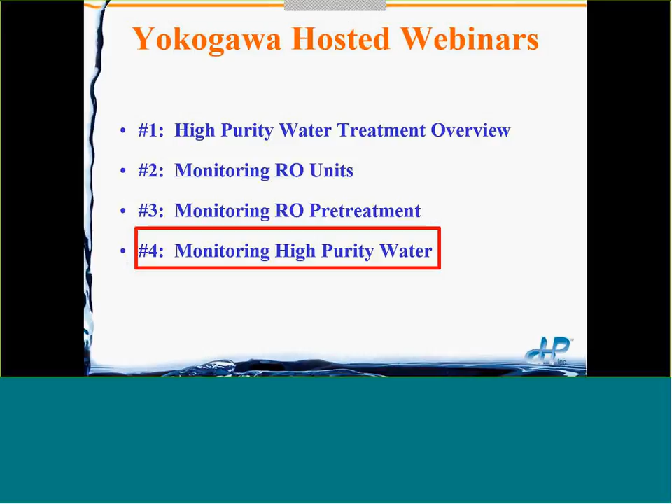So this is the 4th of 4 webinars. We started with an overview, then we looked at monitoring RO units as the main focus, and the third one was monitoring RO pretreatment. Today it's looking downstream of the RO unit, particularly how important it is to ensure that your primary RO unit, your pass RO units, are operating excellently, because you'll have few problems downstream ordinarily if we can make sure the RO units are operating well.

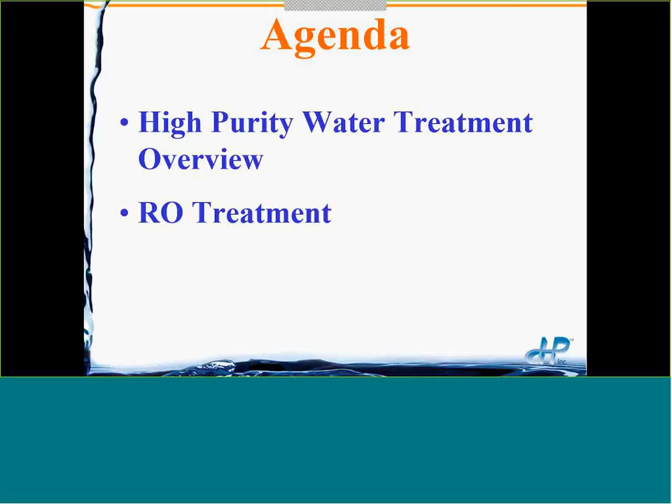So we'll look at high purity water treatment very briefly again, to bring everybody up to speed. A little bit on RO treatment, but then the main point of today's webinar is going to be monitoring the RO unit so that downstream equipment will be operating well. So we'll look at what we need to monitor.

So just an overview from the first session, to make sure we have the terminology down. High purity water treatment is simply taking a raw water, that could be municipal drinking water or lake water, and taking it up to high purity water. We call it end use because every facility will have different end use requirements, so high purity water for one industry does not equal high purity water for another industry.

In today's world, you almost always, you can just about say always, have an RO step between raw water and end use. This is the technology that's going to remove more contaminants, dissolved and suspended, than anything else.

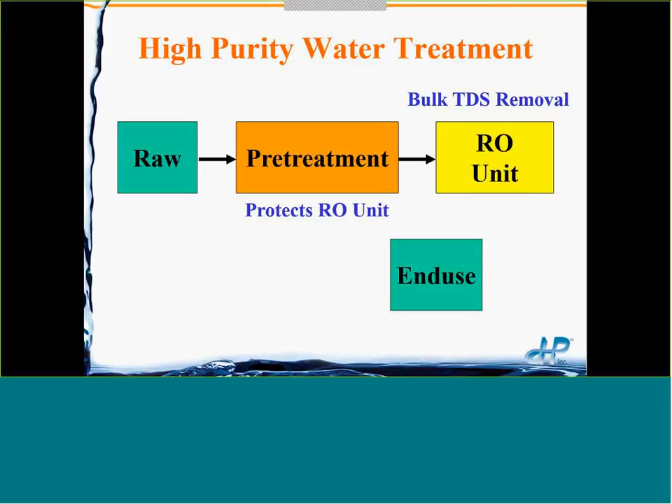We have to protect the RO unit from scaling, fouling, and chemical attack by putting equipment in front of it—we call that pretreatment. Ordinarily, the water that goes through the RO membrane, called permeate, does not meet end-use specifications, so they have to polish the RO permeate up to the specifications of the use requirements.

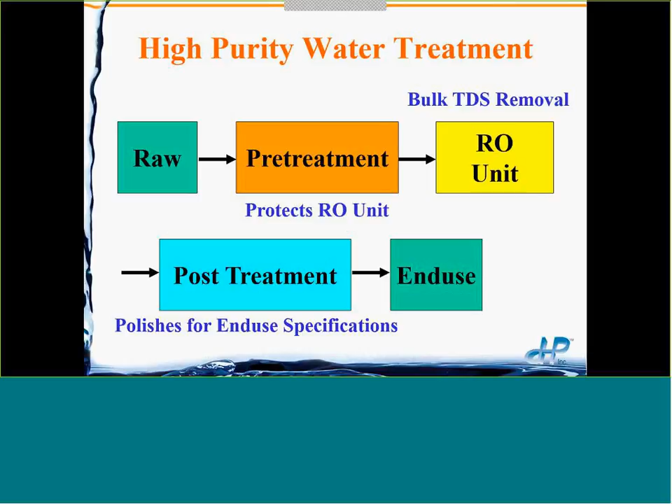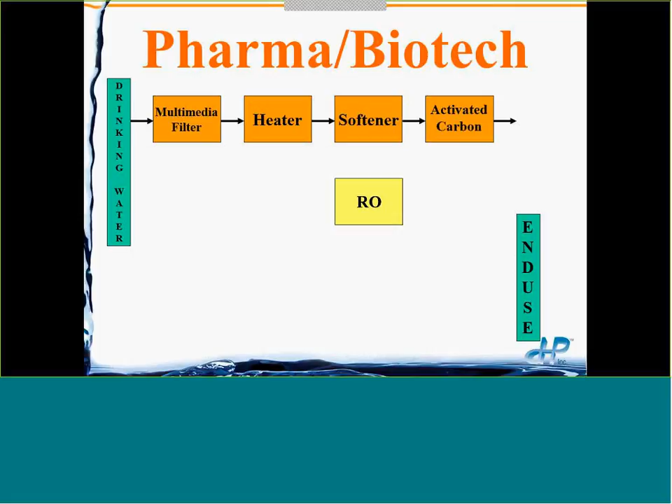As an example, here we have an RO treatment step between drinking water as the raw water and the end-use water for pharmaceutical or biotech, which would be water for injection or purified water. So we looked at pretreatment, and pretreatment for biopharm type systems is different than what you see in a lot of other industrial applications—here we see softener, activated carbon, UV. This won't be as common in other industries.

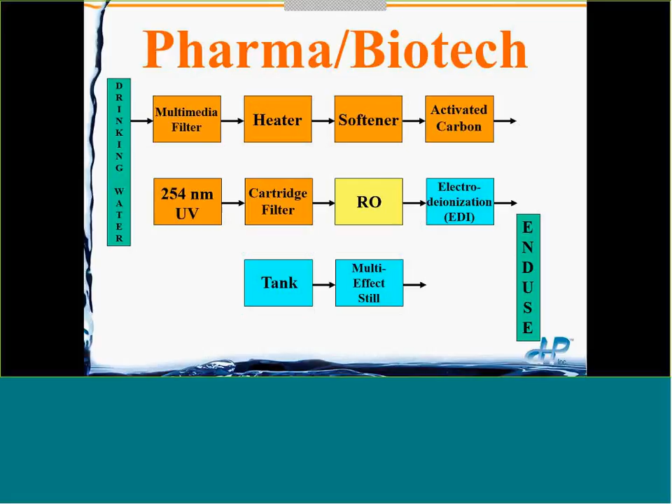Downstream, we're seeing electrodeionization and a multi-effect still—you basically only see stills in biopharm applications.

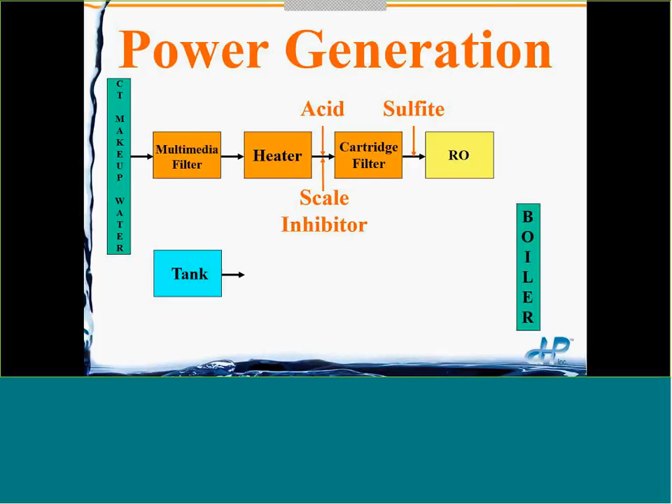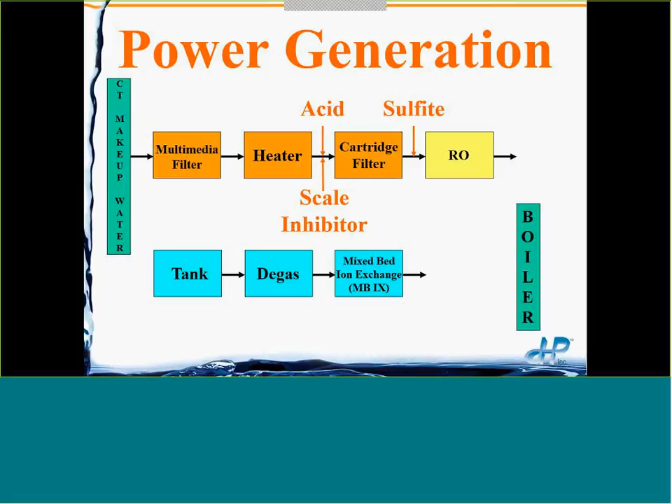Looking at power generation, we see that the treatment to protect the RO unit from scaling, fouling, and chemical attack is totally different than what we saw before. But for high purity water, we have a mixed bed ion exchange. Everything downstream of the RO system is going to be impacted negatively if we allow that RO unit's performance to head south on us.

The last one is semiconductor. Here we're seeing exactly the same kind of pretreatment that we saw in power generation. Now, in this case, we actually have a double pass RO unit.

So today, as I'm talking about monitoring and the importance of making sure that RO unit is operating properly, we're talking about the first pass RO unit. If that first pass RO unit is operating well, you'll likely have few, if any, problems downstream with that second pass RO system.

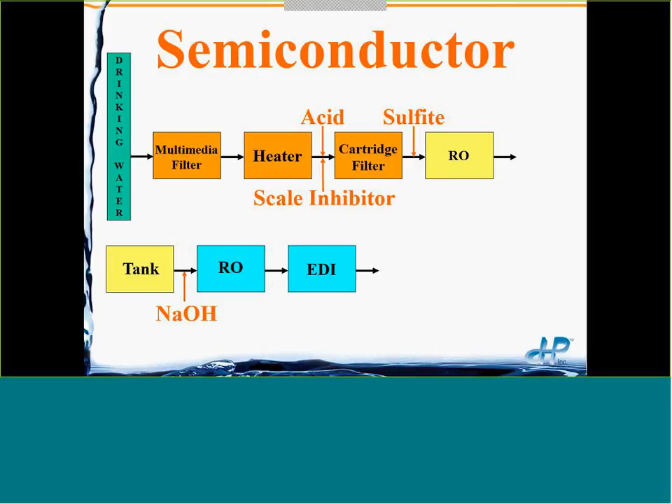Over several years, I can think of maybe 3 or 4 times we've been called on for consulting, and it reminds me of seeing this EDI unit where a plant says, 'Oh, I've got big EDI problems, would you come and help us fix the EDI problems?' My answer to that is, if you have EDI problems, you have upstream RO problems. So you need to focus on the RO problems and get that fixed prior to working on the EDI system.

Just keep that in mind—when you start having problems downstream, you need to take a hard look and make sure the RO unit is not having a problem. Because with this kind of system we're looking at right now, you have double pass RO, EDI, mixed bed, and a lot of other treatment steps to come.

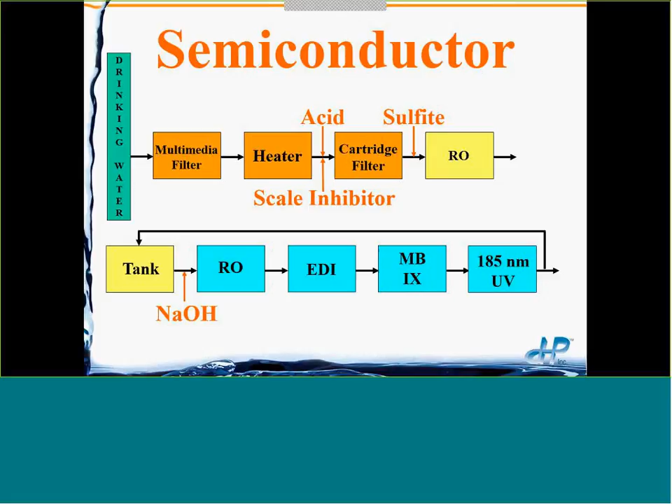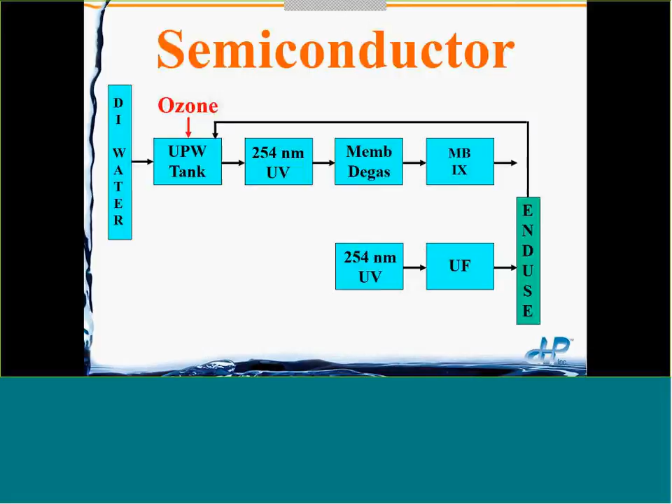Use water may be fine, but you're paying the price because these other technologies are polishing up the problems that a poor performing RO unit is giving you. You're paying that price even if you're meeting end specifications. Additional treatment steps—again, all of these are going to be negatively impacted when the RO unit is poorly performing.

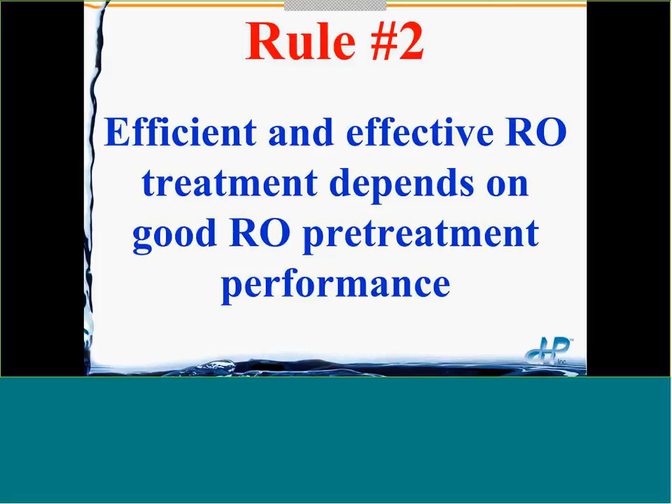So rule number 1: the efficient and effective downstream treatment depends on good RO unit performance. Rule number 2: efficient and effective RO treatment depends on good RO pretreatment performance. So when we see problems downstream, we need to look at the RO unit. When we see problems with the RO unit, we ought to look upstream—we have pretreatment issues that are not protecting the RO unit from scaling, fouling, and chemical attack.

So it's probably one of the most important things, and we covered some of this in a second webinar which is available online. You can go to Yokogawa and view that if you didn't get a chance to see the second webinar.

They're looking at how RO membranes reject dissolved and suspended contaminants, and that we have charged and uncharged contaminants under dissolved, and living and non-living. This is important to remember: something that has a charge, we call those ions. Ions are very well rejected, and the more charges an ion has, the better it's rejected.

Other things, though, have to be rejected based on size alone.

So gases like CO2, oxygen, nitrogen, and sulfide, your normal gases that could be dissolved in water, basically go through the membrane, not rejected at all. Whether other uncharged things go through the membrane will depend on the molecular weight. Below 20 Daltons molecular weight, we get no rejection, and as you get bigger and bigger molecules, you get better and better rejection.

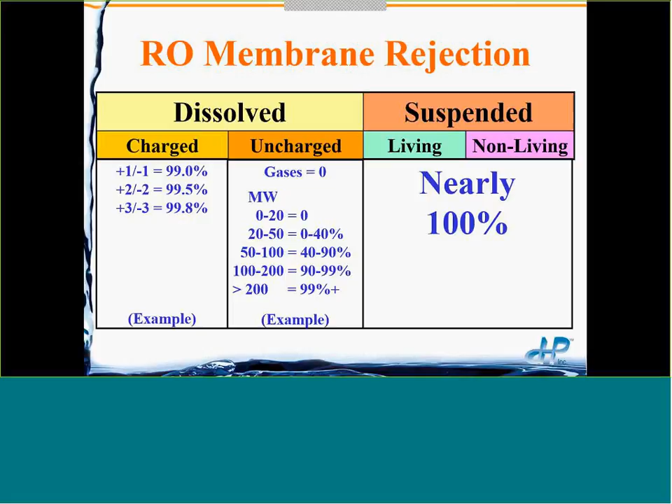Finally, because suspended particles are all relatively huge compared to dissolved substances, rejection is going to be nearly 100%. There will just be little imperfections in the membrane that allow a few viruses through, like 1 in every 10,000, but still nearly 100%. So to summarize: suspended particles get almost 100% rejection, dissolved substances get 99, 99.5, 99.8% rejection.

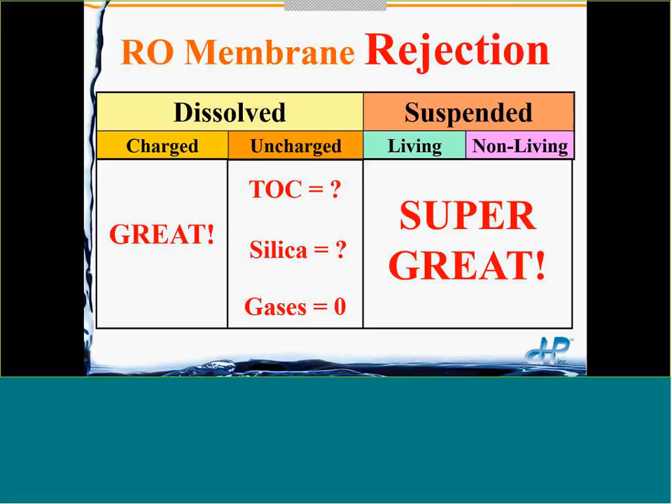Our issue is going to be uncharged compounds, like TOC, total organic carbon, total oxidizable carbon. Those compounds are uncharged, so it depends upon size. If they're huge, they're going to be rejected well, but if they're tiny, they're going to go through the membrane. This is also true for silica and many uncharged compounds, so there will be a different amount of silica that passes through the membrane depending on water conditions. And gases, 0% rejection.

With organics, basically any compound has a carbon atom in it, symbol C, except for a few forms. Things that came directly from carbon dioxide, like carbonic acid and bicarbonate ion, and pure forms of carbon like graphite, diamond, and activated carbon, are not organics - anything else is. We call them organics because they basically all come from organisms. You never know - you could have 5 milligrams per liter of TOC in your feed water, and that could be 50,000 different compounds. We have no idea, because there are so many organic compounds.

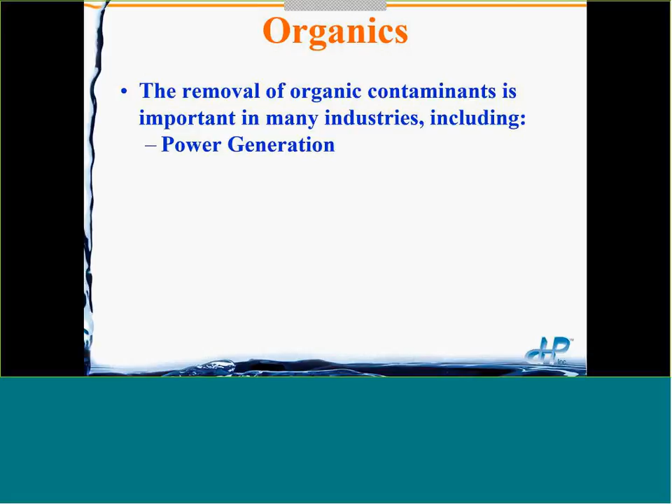Some industries worry about organics as a problem, others don't, so some worry about TOC and others don't. But the thing I want you to remember about organic compounds is that some of them can directly foul membranes and ion exchange resin - directly meaning they bond right to the membrane. So oil or cationic polymer can bond right to the membrane.

But the really important thing for everyone to realize is that organic compounds are food for bacteria - at least certain organic compounds are. So that TOC that passes through the membrane is uncharged and small, and it's likely that many of these organic compounds are going to be food sources for bacteria downstream. So the big part of this discussion is that if the RO membrane is not rejecting well, if it's performing poorly, then organics are going to pass through the membrane more. We measure organic compounds with TOC.

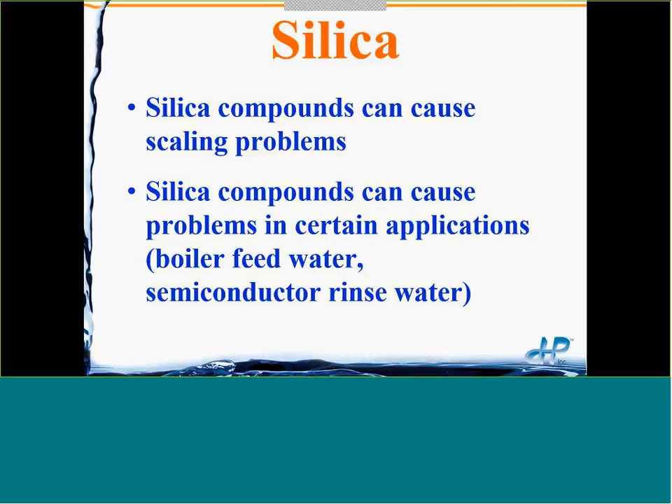Well, CO2 turns into bicarbonate ion at higher pH. Now remember, membranes reject charged things really, really well, and the more charges, the better it's rejected. So CO2 is the gas - CO2 is not rejected by an RO membrane. Bicarbonate ion is, and it's rejected well - it could be 98%.

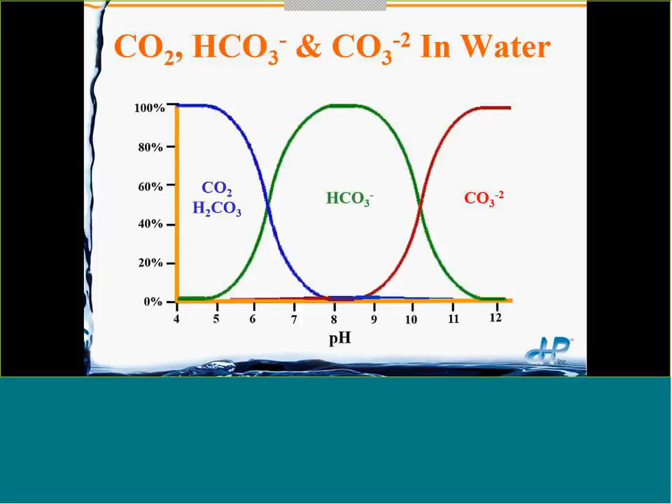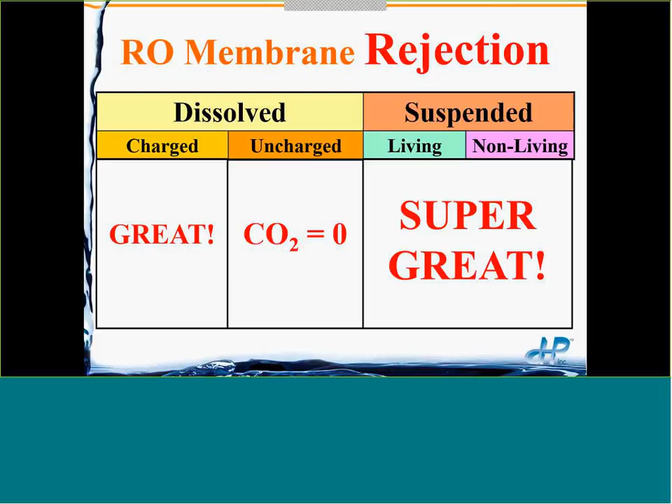So when you put those 3 graphs together, this is what you get. Dissolved CO2, or carbonic acid, is at the lower pH range, but in the normal operating range of an RO unit, most of your CO2 is going to be in the bicarbonate ion form, though you also have dissolved CO2. So if we're only looking at CO2, since there's always a significant amount of CO2 in the feed water, we see CO2 is not rejected by the RO membrane.

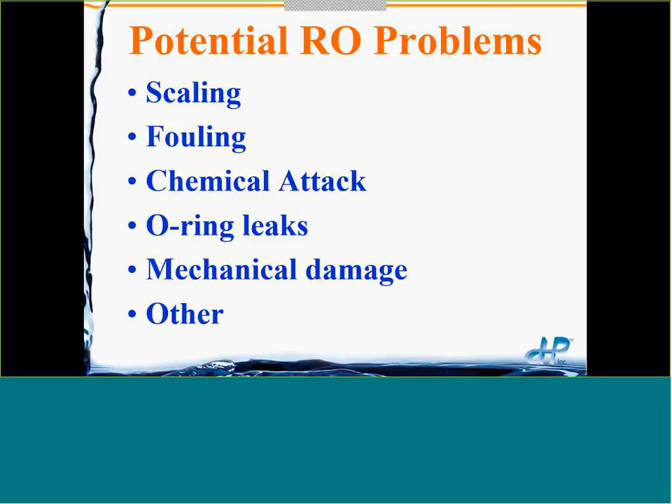We talked in the last pretreatment webinar about potential RO problems of scaling, fouling, and chemical attack. We did not talk about other problems like o-ring leaks or mechanical damage, where particles might cut a membrane. One case, a pump impeller blew up and cut the lead membrane with a chunk from the impeller.

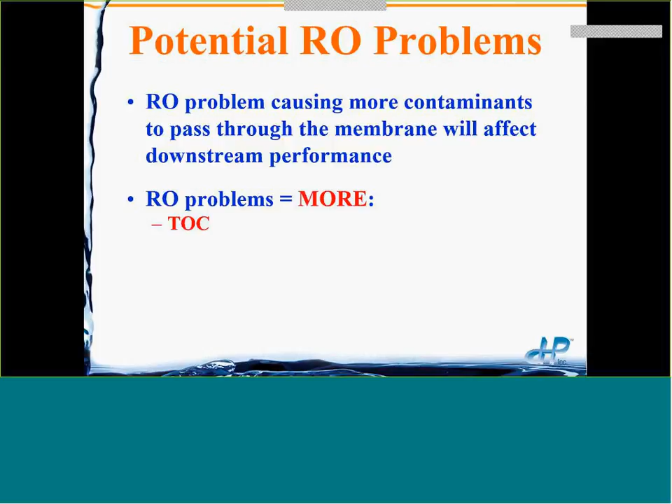So anything that would damage the membrane would cause more contaminants to go through it. Anything that reduces the performance of RO membrane rejection is going to put more contaminants downstream, impacting the downstream purity treatment steps. With RO problems, you're going to get more TOC, more organics going through, more CO2 going through, more monovalent ions (single charged ions), and more divalent ions.

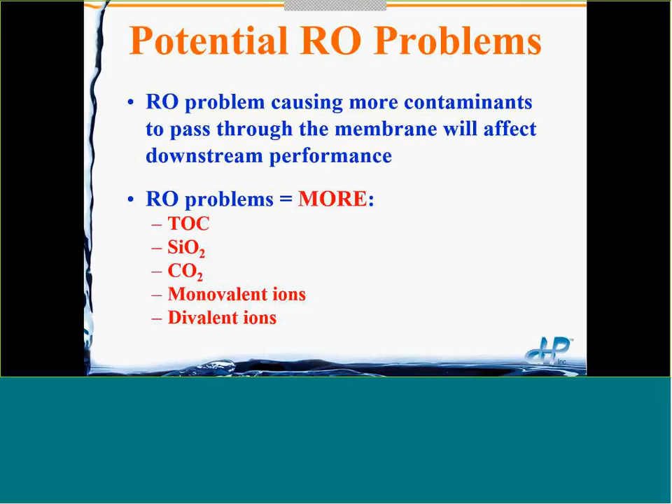So this is something to keep in mind: if the membrane gets damaged, like from chlorine attack, at a certain point it will let the monovalents through, but the divalents are still very well rejected. As more damage occurs, the divalents start going through as well. So if we catch problems at an early stage, that's going to be best for us.

Now let's talk about the potential consequences of bad RO unit performance. In this case, the RO box is shown red, meaning the RO unit has problems: scaling, fouling, chemical attack, an o-ring leak, permeate back pressure damage, anything that could cause the membrane to not reject feed water contaminants. That's then going to allow more contaminants to go through the RO membrane and happen downstream.

TOC going through can, over time, biofoul a tank. I was at a power plant about 4 years ago, I can't remember exactly, maybe 3 or 5 years. This huge tank, like a 1 million gallon tank, became biofouled, and the way we found it was that the mixed bed had shortened run times and really long rinse-up times.

That's kind of the indicator for organic fouling, so the ion exchange resins were becoming organically fouled. When there's this problem, you get called in saying 'I have a mixed bed problem.'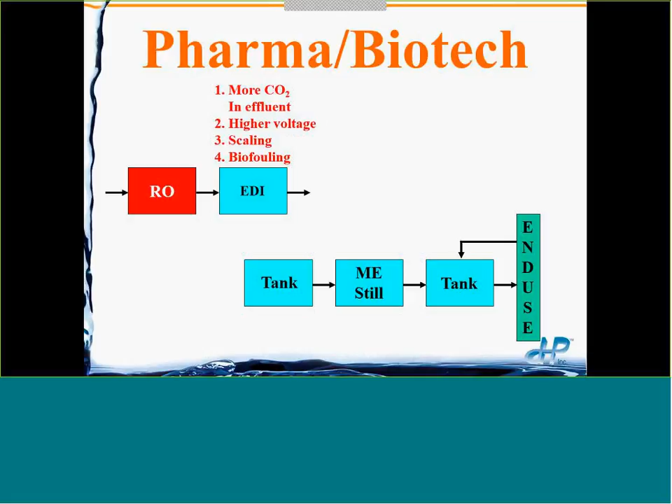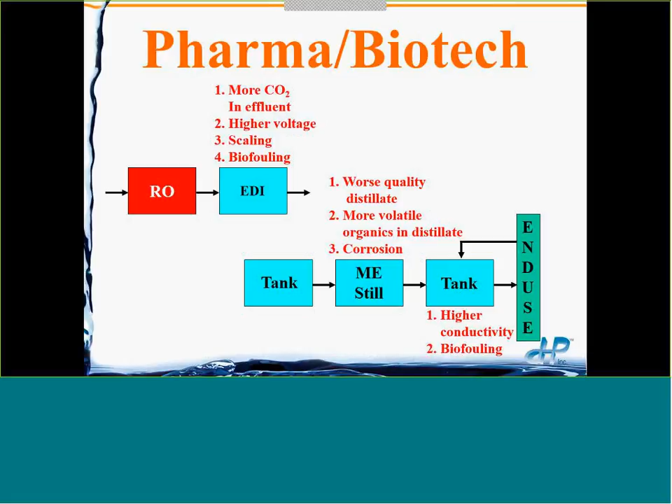And due to the TOC passing through the RO membrane, in areas that are not energized, you get bacterial numbers, I'm calling it biofouling. So impacts, especially volatile organics, the small organic molecules that pass through the RO membrane and the EDI unit, because you've got a bigger load going through, can actually volatilize in the still and cause problems.

We actually had two autopsies come in. Client sent us an element from the second pass RO unit and also from the first pass. I looked at the second pass autopsy first. I couldn't believe it — I've never seen a scaled second pass RO membrane before, ever. It's the only time in all my years that I've ever seen that. And I knew that the first pass had to be just shot for the scale to reach the second pass.

Sure enough, when I looked at the autopsy on the first pass RO unit, it had rejections of like 50%. It was just totally shot. But because you have all this downstream equipment, nobody may be on your case, because the end use quality is still good enough — all this equipment is taking up the slack of that first pass RO unit's poor performance.

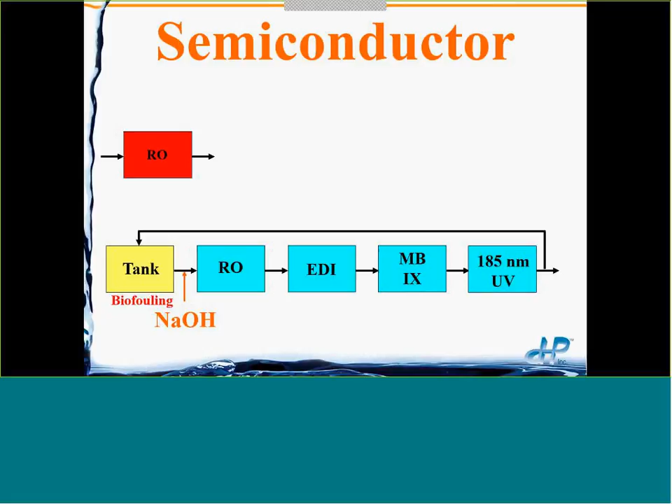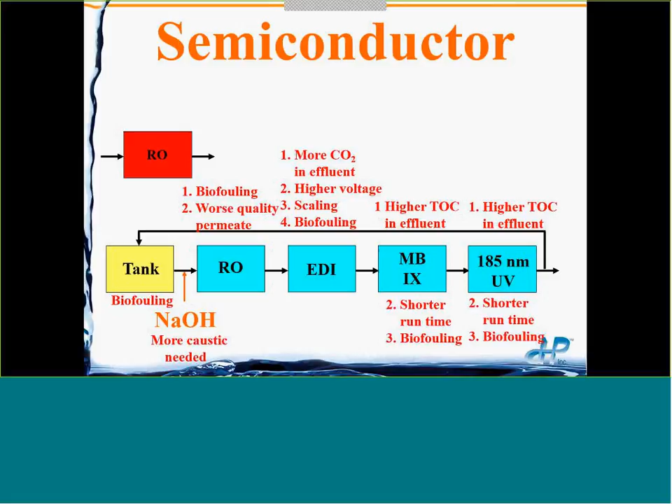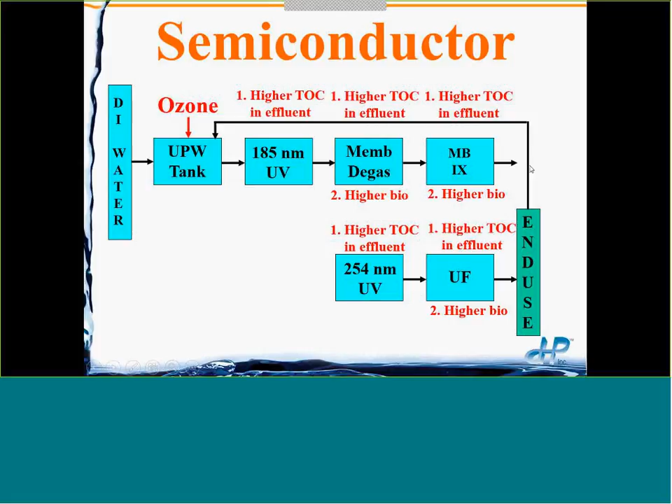But it does take a toll. It's going to cost money. And some of the things we've already talked about, most of these, so I don't need to go over that again. But it's going to reduce the efficiency down until things are really bad, and you're not actually going to see it in the high purity loop, because there are so many treatment steps. But it's going to be a cost to pay for that.

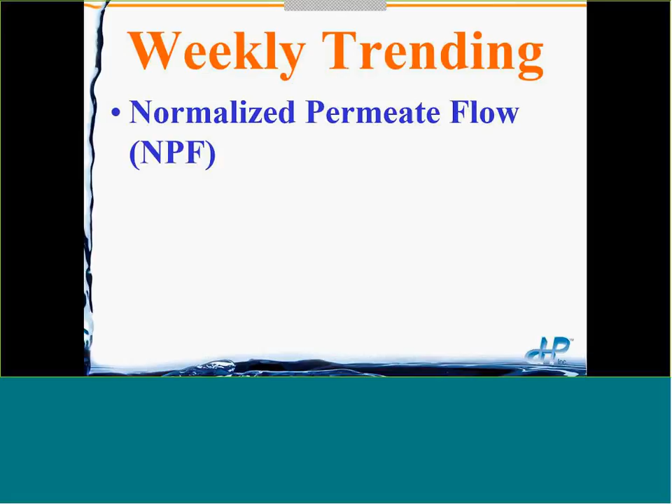So we want to be able to catch problems at an early stage. Now, we went over this in the RO monitoring.

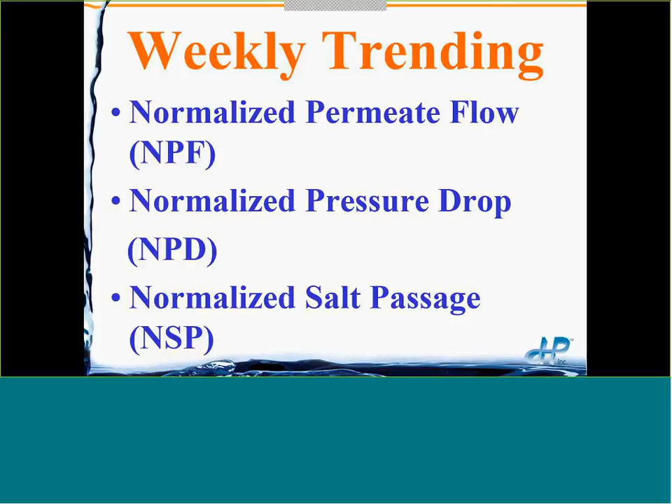Permeate flow, pressure drop, or just pressure drop. Most of your manufacturers' software programs don't normalize for pressure drop, which is normalizing for temperature and flow rate. It's okay even if you just use pressure drop. We want normalized permeate flow, and for sure, normalized salt passage. Why? So we can make sure the system is operating as designed and we catch problems at an early stage. So I'm not going to go into a lot of detail.

We did go over this in the RO monitoring. So notice permeate flow with scaling and fouling — you'll see it trend down. This is where we will jump on things, right when we start seeing problems occur, monitoring and trying to catch these problems at an early stage.

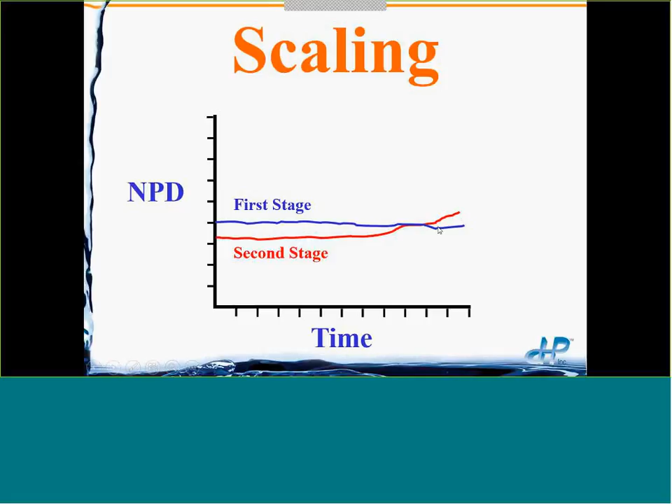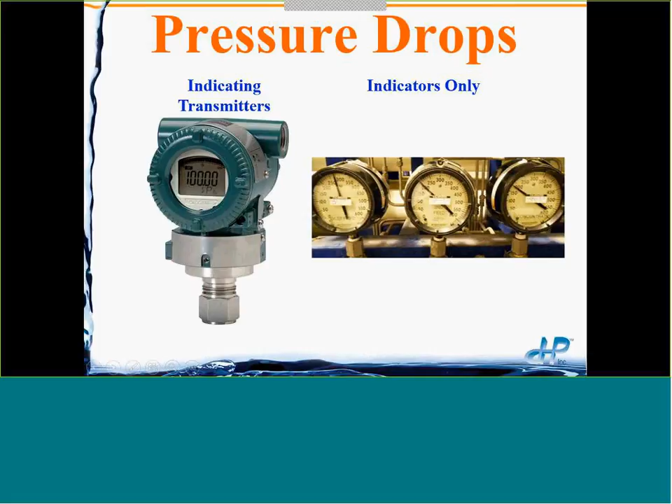This is normalized pressure drop. You should be monitoring the pressure drop across the first stage and the second stage, and that could be with on-stream indicating transmitters, or it could be you have some that just has the indicators only. But input this into performance software programs — all the membrane manufacturers have them for free — and then you monitor your performance.

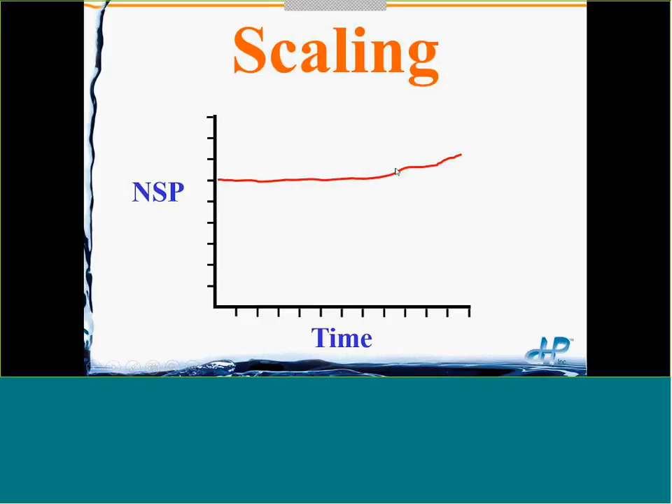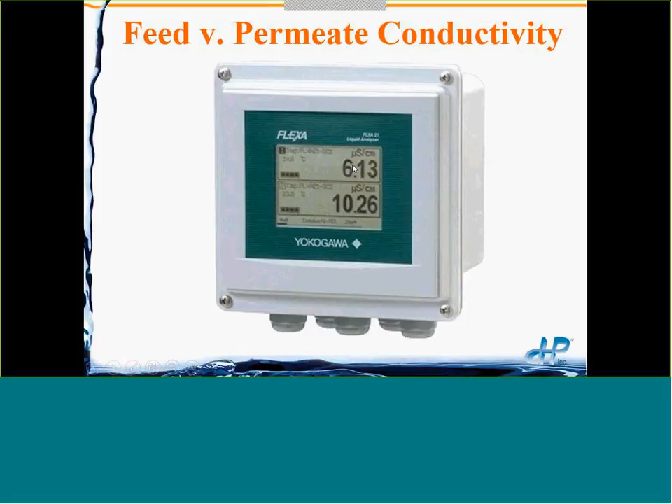So when you start seeing salt passage increase, we don't wait too long before we figure out why that salt passage is increasing, because that is going to impact all of our downstream equipment. Salt passage, we compare the feed and the permeate conductivity. We're actually not looking at feed and permeate here, but we see two channels. We could have a feed and permeate on here and be able to track what's happening.

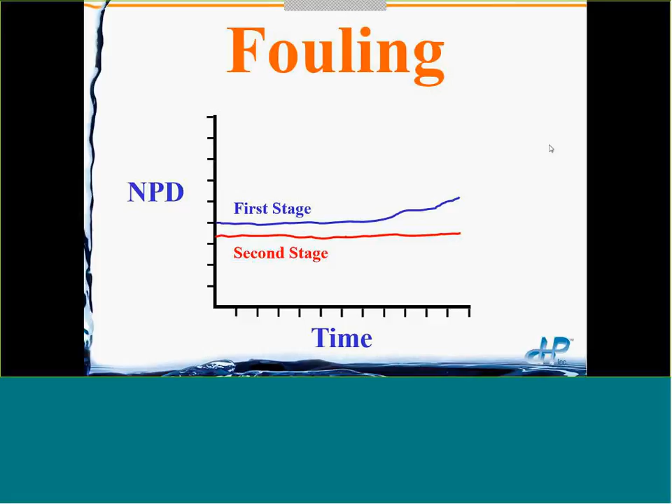At the software programs, for sure, we can track what's happening with the membrane performance. And then for fouling, normalized pressure drop — bio or particulate fouling will actually show in the first stage. So again, we want to judge this at an early stage before it starts impacting our downstream high purity systems.

Being serious, chemical attack can happen almost from day one, so this could be chlorine attack, and we want to jump on it. With chemical attack, the pressure drops won't give us any information, but the salt passage will definitely go up. As we're monitoring downstream of the RO unit, we will monitor the permeate conductivity.

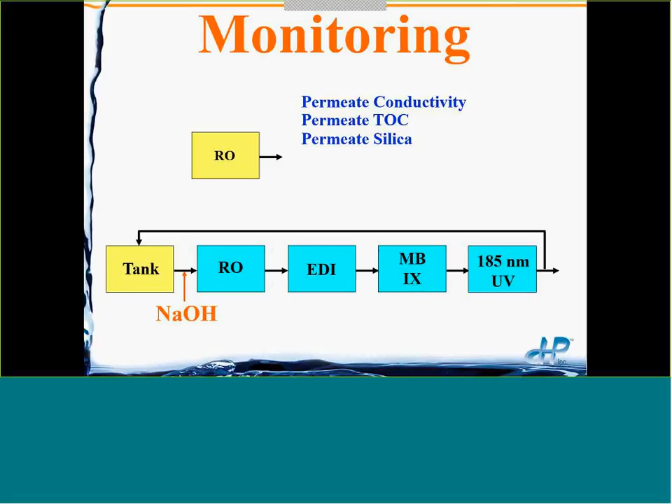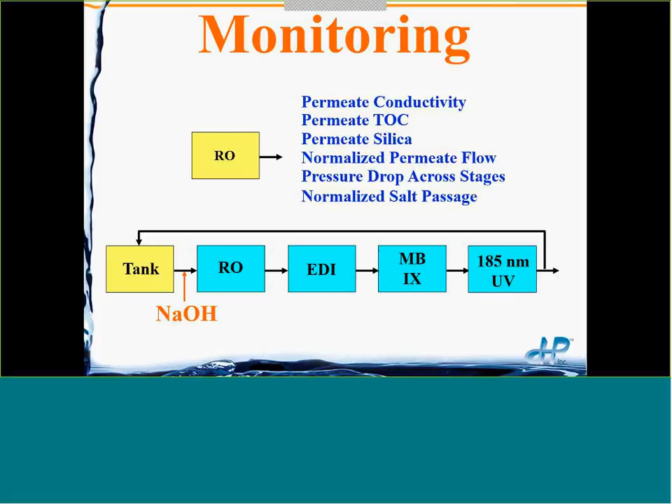We monitor TOC, silica. Now this is for the highest purity system. Not everyone, like I said, cares about silica, but certainly everyone cares about conductivity, permeate flow, the pressure drop across each stage so we can find out whether it's front-end fouling or rear-end scaling, and the normalized salt passage.

With on-stream instruments, we also have to have calibrated bench portable type instruments so that we can make sure that our on-stream instruments are accurate.

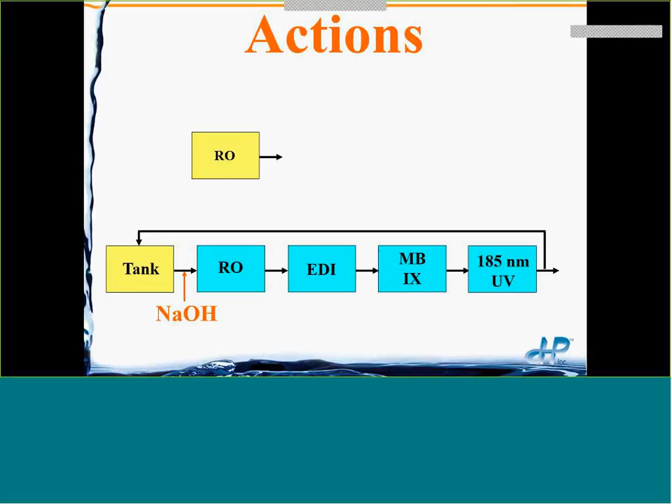Actions that we have to take when there's a problem - this is something that hopefully is intuitively obvious now. If an O-ring leaks, it's hard to imagine there's much worse than that, because an O-ring leak bypasses the membrane. So now particles can go through, double charged ions, single charged ions, really everything. A small portion of the feed water is bypassing the membrane, and that is immediately going to impact downstream.

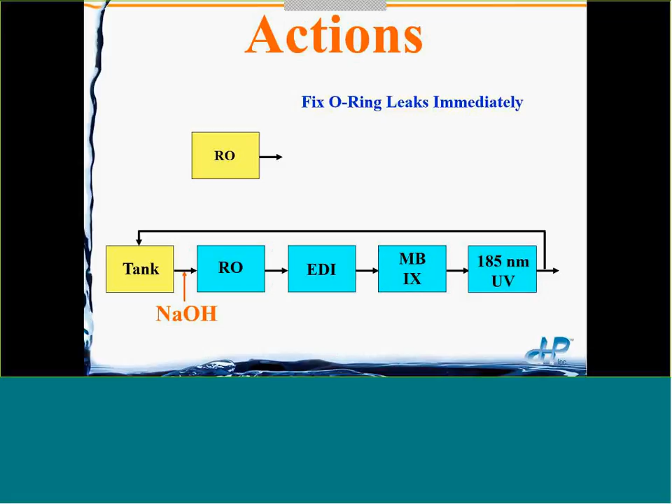Typically, you're not going to see an O-ring leak until you start up, so you may just be running fine, you shut down, you start up, and boom - an O-ring gets cut or in some way is not sealing properly. When you see something like that, it really needs to be jumped on, even if it's not impacting your end use today, it's going to impact your downstream equipment.

Fouling, biofouling being the most common - again, initially downstream equipment is going to save you, but eventually it's going to be a nightmare, so that could require chemical cleaning. With scaling, we don't want scales to stay there, because scales affect conductivity in the permeate, and the starting and stopping of RO units with scale crystals on the membrane can cut the membrane, since crystals can be sharp.

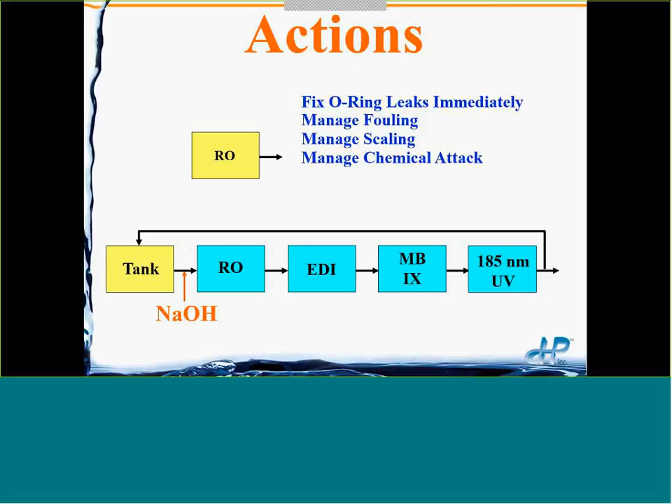So fouling, scaling, and chemical attack, in a lot of cases, mean that you have to look at the pretreatment system and do the things that we talked about in a previous webinar. You want to chemically clean at an early stage - this is a big problem in the industry, we wait too long. So we want to clean early and hope it won't get any worse, trying to keep the conductivity, TOC, and silica down to new or near-new performance.

And then if we see damage, we can replace the damaged elements. That doesn't mean you have to replace every element - it's the ones that can get you back to good performance.

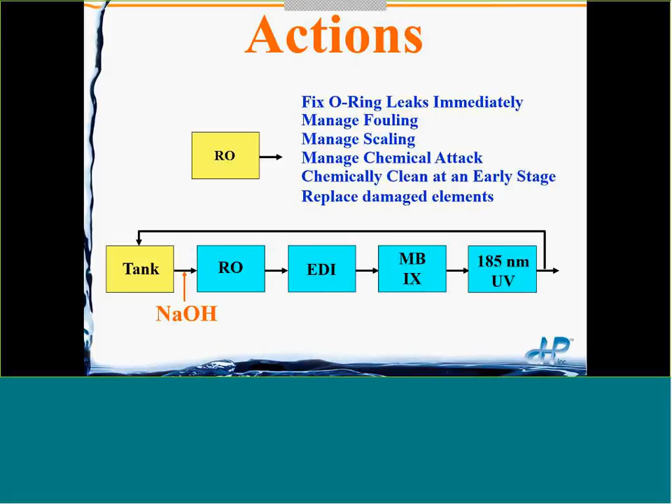To summarize and conclude, for post-treatment monitoring, each industry will have their own specification. Microelectronics rinse water will have on-stream instruments measuring parts per billion, parts per trillion levels of all the different contaminants. For power stream, maybe specific conductivity, and TOC is not as common, but certainly silica is. Everybody's going to be doing conductivity or resistivity - resistivity is one divided by the conductivity, so it's just a different way of measuring basically the same thing.

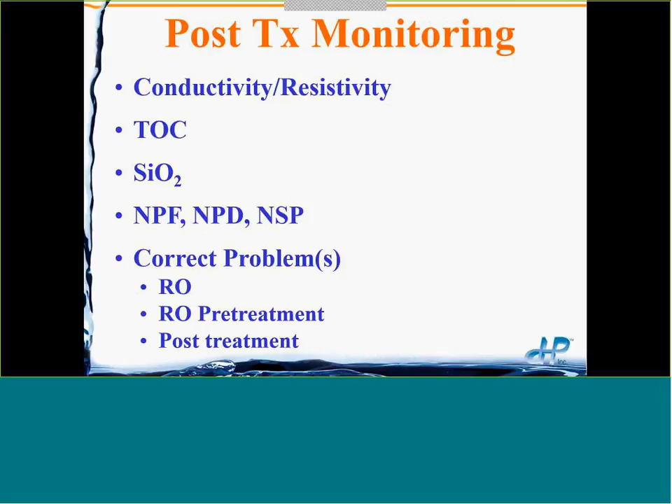Some industries measure TOC, some industries measure silica, all industries monitor normalized permeate flow, pressure drops, and normalized salt passage, so that we correct problems at an early stage in the RO unit. And then if the RO unit is having a problem, take a look at RO pretreatment. Once we fix those problems, then we'll see if there's a continued problem in the post-treatment system.